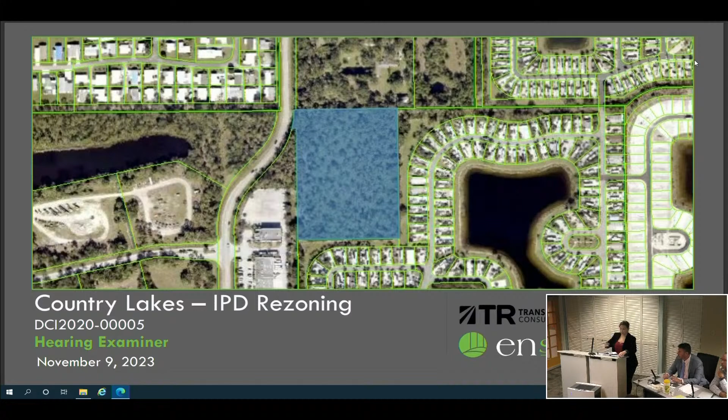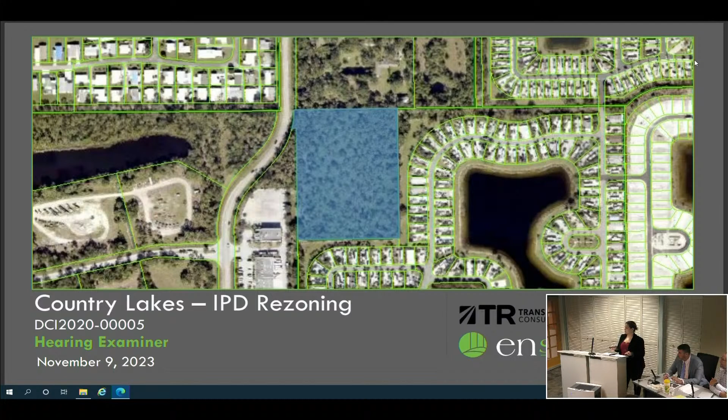Not working? It's working. It was working earlier. Let me try it.

The subject property is approximately 6.86 acres. It is located east of Country Lakes Drive, significantly east of I-75, north of Luckett Road. Its current zoning is Ag 2, and the current future land use is urban community. As Mr. Kramer mentioned, the request is to rezone to industrial planned development.

To the north of the subject property is a single-family residence on Ag 2 zoning. To the east and south of the subject property is the Cypress Woods Mobile Home RV Park. West of the subject property is the Country Lakes Drive right-of-way. Adjacent to the southwest portion of the site is industrial flex space. Similarly, across Country Lakes Drive on both sides of Kelly Tractor Drive is light industrial space, which has an underlying industrial interchange future land use.

The subject property is serviced by Lee County Utilities for potable water and wastewater. Potable water is treated at the North Lee County and Olga water treatment plants. Wastewater is treated at the Central Wastewater Treatment Plant.

The master concept plan has been further annotated to clarify where buffers and uses are located. The principal uses are highlighted in purple. Accessory uses are highlighted in red and consist of a modest office building and a service area. The buffers are highlighted in green.

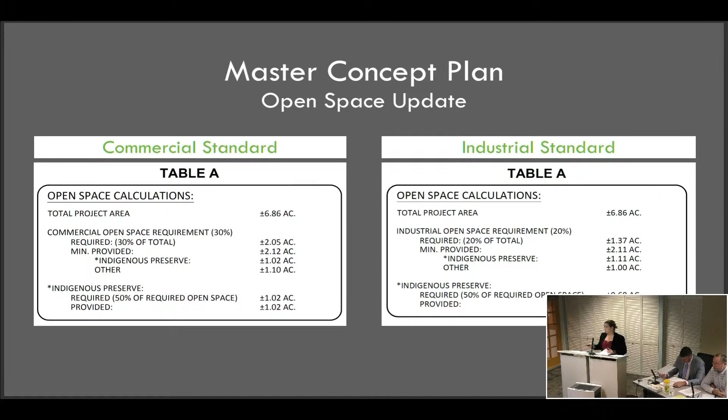I have a lot, especially if there's a buffer, so do you want to do that now, or complete the presentation and come back? We can come back to this. Okay, yes, so if there's a change, it sounds like that might be news to staff, so let's just put a bookmark right now on the buffers, and we'll come back to that at the end.

There are two deviations being proposed. Both have been reviewed by staff and are recommended for approval. The first deviation is from LDC section 10-416D4, which requires a 25-foot wide type E buffer with a wall, to allow an enhanced 40.5-foot wide buffer, inclusive of a 30-foot wide type F buffer, as well as an additional 10.5 feet of indigenous preserve.

The southern buffer is also proposed to consist of a 30-foot wide type F buffer. This buffer would be enhanced by 20 feet of indigenous preserve. This deviation is being sought to enhance the buffering and screening of the site through native vegetation in lieu of a solid wall.

The second deviation is from LDC section 10-416D4, where a type E buffer is required, to allow the wall requirement to be met by the proposed building. This deviation is being sought since it would be unnecessary to provide a wall to buffer a low building with a wall between the uses and the proposed vegetative buffer.

Are there any questions on the buffers? Yes, if we could get into the buffers then, if you can go back. So the deviations were my first question, because it mentioned a few times in the staff report that there would be no deviations, but then it recognized the two deviations, and there's no analysis of 1.1.2.

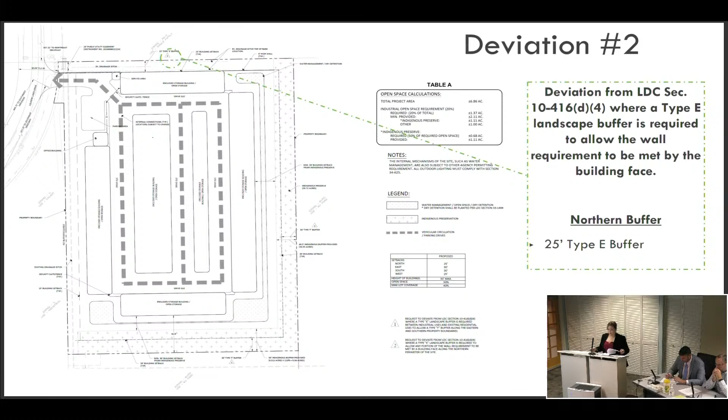Could you walk me through again then, just with the buffers, what's adjoining on each of these, on the other surrounding land uses? Sure. So along the northern buffer is that single-family residence to the north. It's zoned Ag 2. And then along the eastern and southern, unfortunately we have the screen there cutting it, but the southern portion of the property is abutting the Cypress Woods RV Park.

So that's what's going on both the eastern and southern boundaries. And then along the western boundary, we have some industrial flex, a little preserved pocket there that's part of the industrial flex area. And then we abut Country Lakes Drive.

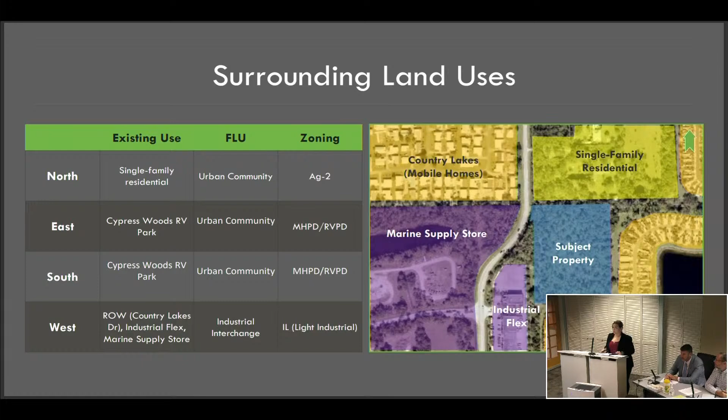So there will be a functional wall to some extent, either by virtue of the buildings or a wall itself, that's shielding the adjacent residences? Correct. On the three abutting boundary lines where there are residential uses? Yes.

I'm still going to need that policy 1.1.2 criteria analysis, but we can leave the record open for that potentially if we need to. But that was the extent of my questions on the buffers for now. We want to move to the next section.

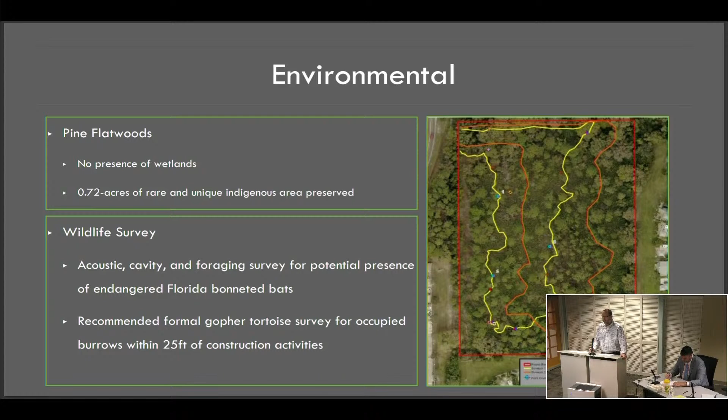But additional environmental review will be done to update it prior to site development. Typically when you do a development order, it has to be within a certain time frame. This one's outdated, so it will be redone. Thank you, and I will turn this over to Yury.

Good morning. For the record, Yury Bykau with TR Transportation Consultants. I've been sworn in and previously accepted as an expert in transportation planning, and would like to be accepted as one today. Yes, thank you.

We prepared a traffic analysis for this rezoning application, which is seeking approximately 95,300 square feet of mini warehouse and storage uses. As part of our traffic analysis, we first prepared a trip generation analysis consistent with the ITE trip generation manual, which is a required source for us to use to come up with traffic projections for projects. We then took the trips and added them to the surrounding roadway network.

We prepared our typical link level of service analysis on the surrounding roadways, which include Country Lakes Drive. The results of our future link level of service analysis indicated Country Lakes Drive, which is a collector roadway, will operate at acceptable level of service C, or in other words, with sufficient capacity, both with and without the project in the future build-out project traffic conditions.

Staff reviewed our traffic study and agreed that the project will not have a detrimental impact to the surrounding roadway system. And again, we still have to go through a development order process with the county. At that time, we'll prepare another traffic analysis, which will be more detailed, and we'll look at the need for turn lanes and other site-related improvements on our driveways.

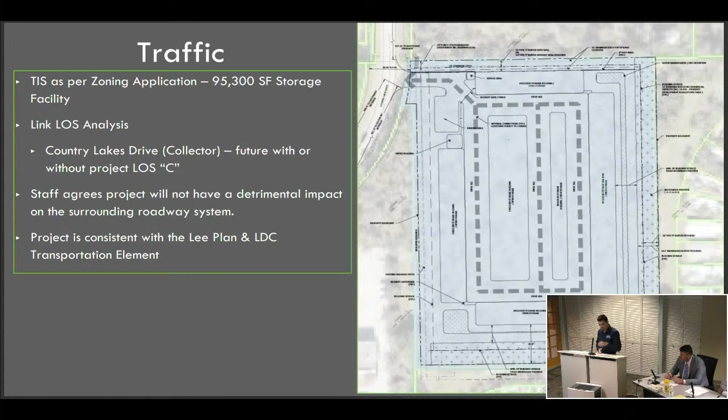Cindy Lead Brizuela for the record. The project is consistent with a number of Lee Plan policies that are highlighted in the next few slides. Consistent with policy 1.1.4, which describes the underlying urban community future land use, the project is proposing a light industrial use.

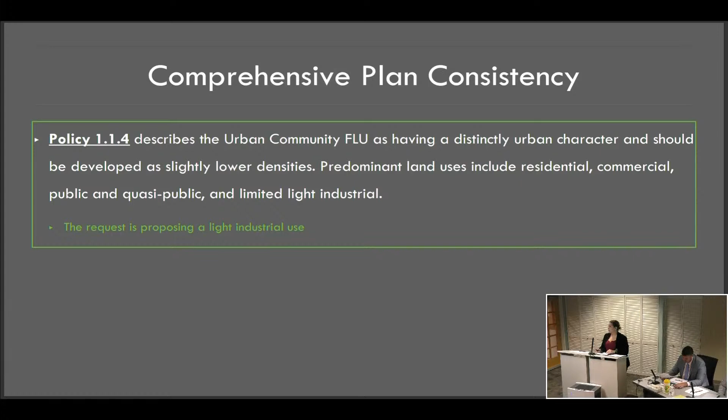Policy 7.1.1(5) requires industrial development to address a number of criteria such as air emissions, the project's impacts on environmental and natural resources, as well as the project's impacts to neighbors and surrounding land uses. The proposed project will not contribute to air emissions at a rate above average for the use. Additionally, the property does not feature any natural resources that would offer a benefit should it be preserved.

Regarding the property's impacts to neighbors and surrounding land uses, the property is being sufficiently screened from any existing residential uses through the incorporation of enhanced vegetative buffering. Due to the property's configuration, it will also be sufficiently screened from Country Lakes Drive, further isolating the use from the surrounding streetscape.

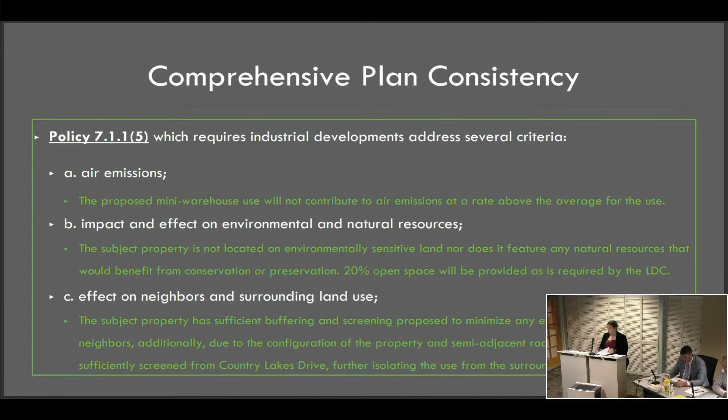Other criteria to be addressed include impacts to water and employment characteristics. No impacts to water quality or needs are anticipated as a result of the project. A stormwater narrative has been provided for staff to review, and a detailed set of engineered plans will be provided at the time of development order to further address any potential impacts that may arise.

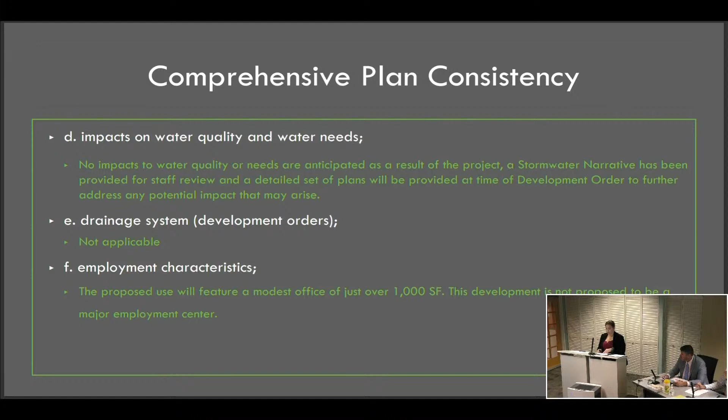Regarding the employment characteristics, it should be noted that the proposed site plan includes a modest office area and the development is not proposed to be a major employment center. No deviations are being requested that would impact the project's accessibility. The fire department should therefore have sufficient access to safely enter and exit the site. The proposed development is also not anticipated to generate noise or odor above the norm for the proposed use.

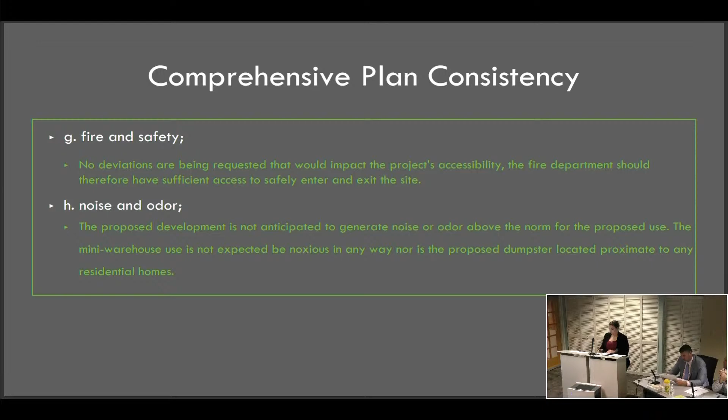The proposed project features setbacks, landscaping, and buffering as required by the Land Development Code and has these standards annotated on the master concept plan, ensuring that future development of the site is consistent with today's Land Development Code.

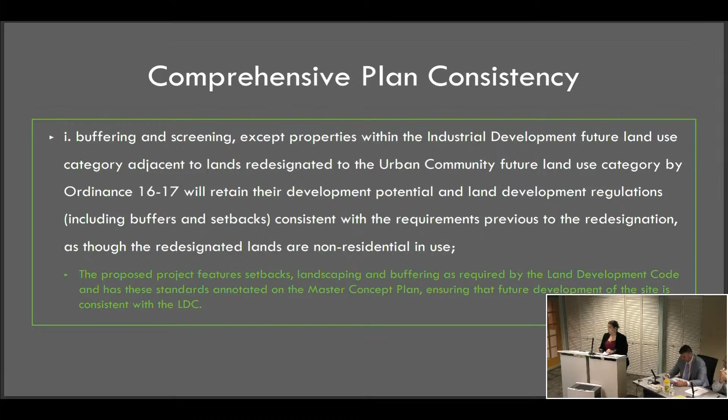The property has sufficient access on Country Lakes Drive, a major collector to service the site. Additionally, the subject property will be serviced by LCU as noted on the letter of utility availability.

Policies 7.1.2, 7.1.3, and 7.1.6 are also being supported through the rezoning of this site via the planned development process, by having the property adjacent to a major collector and by providing sufficient buffering from surrounding uses.

The request is consistent with Goal 9 of the Lee Plan. Objective 9.2 is being supported by proposing an industrial use on the property, which better aligns with the urban community future land use designation than the current agricultural zoning. Finally, the request protects the rural character of the Caloosahatchee Shores community by providing enhanced buffering and indigenous open space to shield the use from the view of surrounding uses, consistent with Goal 21.

The findings that must be made for the rezoning cases are described in LDC section 34-145D4A1. The request must comply with the Lee Plan. It is consistent with policy 1.1.4, goal 7, goal 9, and goal 21.

B, that the request meets this code and other applicable county regulations or qualifies for deviations. The two deviations being requested both enhance the achievement of the objectives of the plan development as well as preserve and promote the general intent of this code to protect the public health, safety, and welfare.

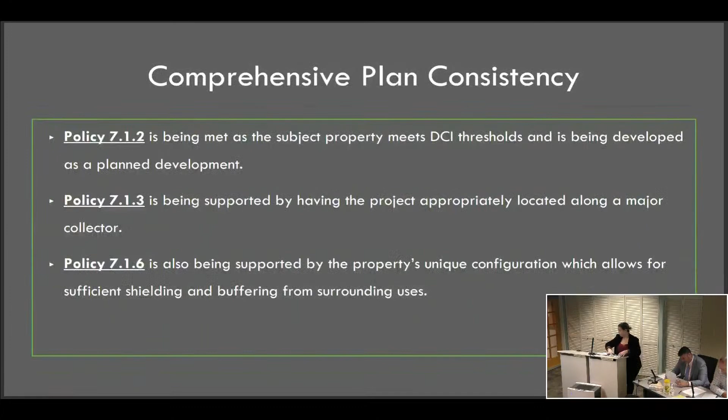Did staff have anything for the applicant? No. Okay, thank you. I'm ready for staff then, whenever you're ready, Sharon. Want to go to the master concept plan?